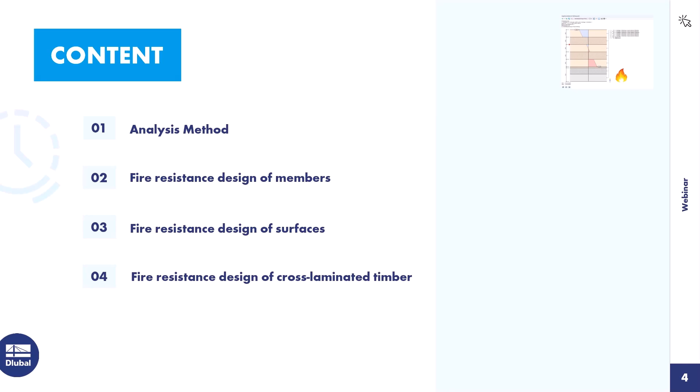So we start with theory, then we switch over into the program, we check a few members, we check the design of surfaces, and at the end we will design cross-laminated timber for fire design. Okay.

So the first topic today is about the general requirements. This content here comes from the Bavarian building regulations, and I am sure it is similar in your country. It does not make sense to have a more detailed look into any regulations because we have so many people here from so many countries and every country is a bit different. But I guess in general this sentence says everything, so that's why I read it.

Buildings must be arranged, constructed, modified and maintained in such a way that the outbreak of fire and the spread of fire and smoke are prevented, and that in the event of fire the rescue of people and animals and effective firefighting operations are possible. And I guess it is clear to everyone that this is our big aim.

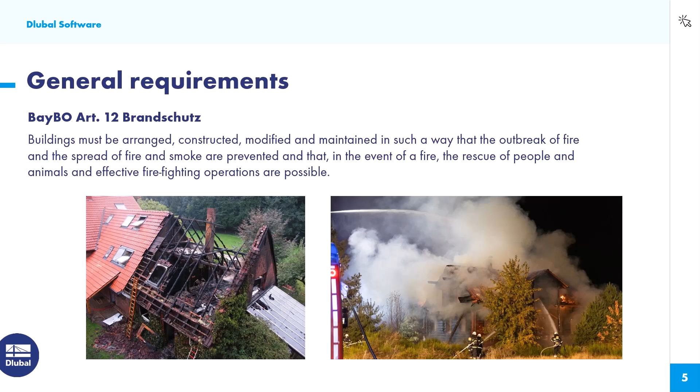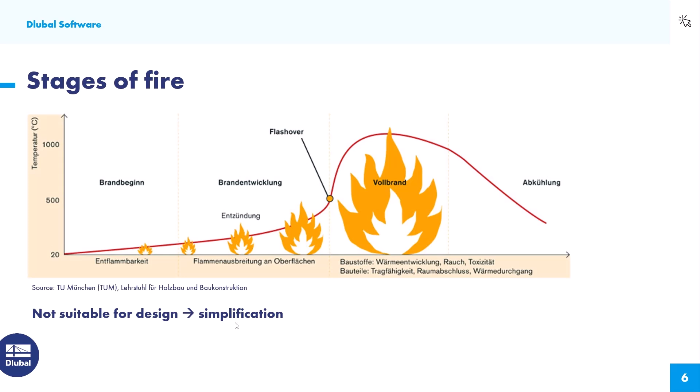Okay, so then we need to talk about stages of fire. The first stage is the non-flaming smoldering before it goes over to the developing fire stage. Then we get the flashover where we receive the fully developed fire before it comes to the decay stage. And of course, when we think about this red curve here, you can imagine that this is hard to simulate in a structural analysis. That's why we need a simplification, and how this simplification looks, you will see in the next slide.

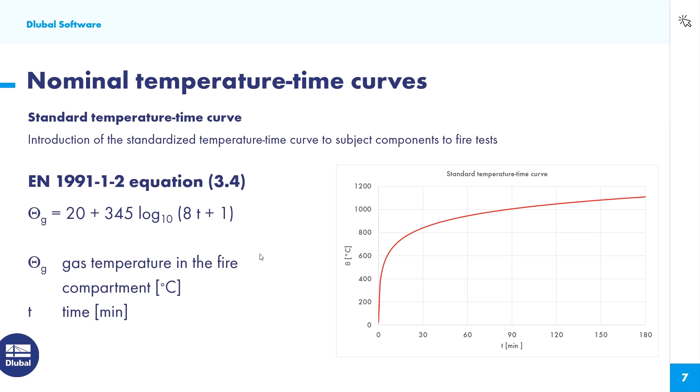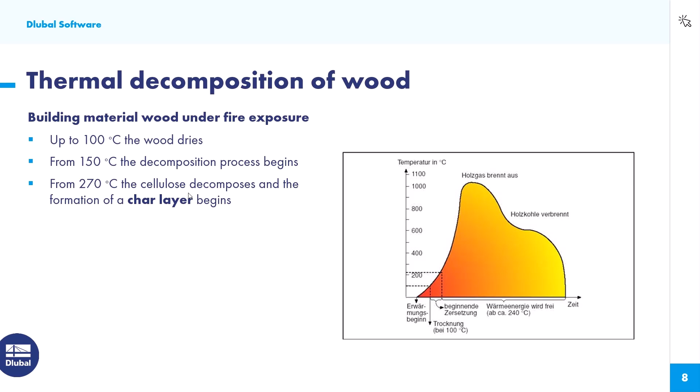Next slide is about thermal decomposition of wood. I guess it's clear to everyone that in the beginning the wood begins to dry. This is up to 100 degrees Celsius. From 150 degrees Celsius, the decomposition process begins. So we are around here. And it has its peak at around 270 degrees Celsius, where the cellulose decomposes and the formation of a char layer begins. And this char layer plays an important role, and it's actually the key for our timber design. That's why it's in bold letters.

A few properties of this char layer. This char layer has a lower thermal conductivity than unburned wood. That's why it delays the charring, and hopefully a residual cross-section remains. And that's the reason why we have a very favorable behavior during fire in case of timber. As you see here, when you check the cross-section after a few minutes, I don't know how many minutes these are, maybe 30 or 60, you will see that the timber inside is still brand new.

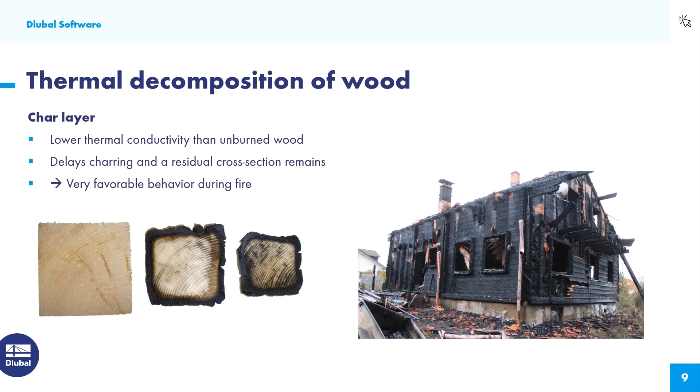Fire resistance classes. So I don't want to spend so much time on it, since I guess that's clear to everyone. We have these classifications. We have load-bearing components and non-load-bearing components, but of course we are focusing on the load-bearing components in our structural analysis. And we need to consider integrity or not. That depends on, of course, the building code or whatever.

In the new Eurocode, this plays a more important role, and also we are focusing on it in the future, but for now we have no integrity. Or we do not prove any integrity, since it is actually not a design check in terms of structural analysis, but as I mentioned, it plays a more important role in the new Eurocode.

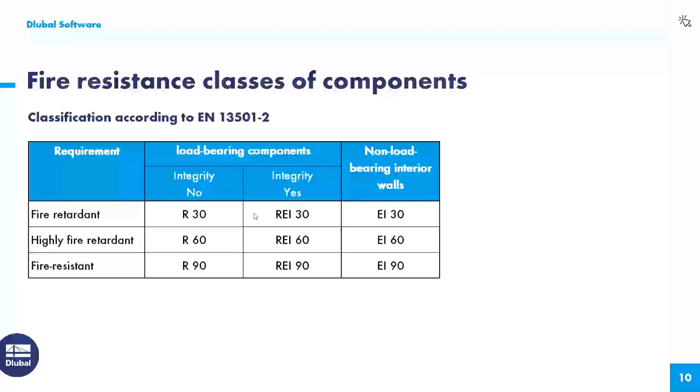Okay, fire retardant, highly fire retardant, fire resistant. I guess that's clear to everyone. We talk about R30, R60, or R90, or R120, and so on. The indexes here are described on the next slides. I don't want to spend much time here. Please check the video afterwards and pause it. You will be able to read it in detail. What we're talking about today, we're focusing only on the load-bearing capacity.

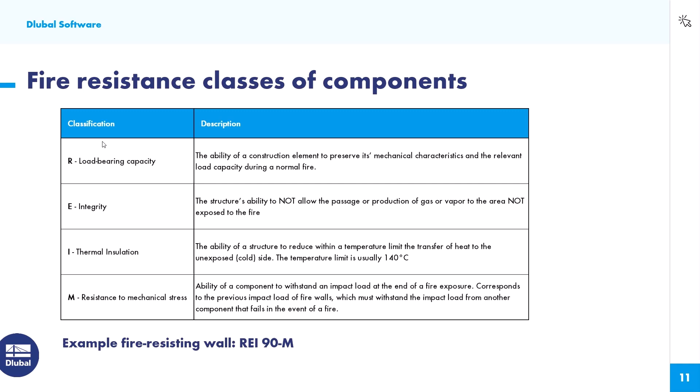Okay, so now let's start actually with the structural analysis part. Combination rules for actions. So we need to know which loads we can or we have to consider in case of fire design. In this case, we have to look into Eurocode 1, which refers to Eurocode 0, chapter 6.4.3.3. And this is nothing else than the extraordinary design situations.

There's a small error here. Sorry, it should be or and not the German word oder. I'm sorry for that. I forgot to replace it. So it's without any partial safety factors. You see it here, not for the dead load and also not for the variable loads. And there's only the question if you have to use ψ1 or ψ2 for the leading variable action, but this information you should get from the respective national annex of your country.

Okay, so there's also this simplification where you use the internal forces or the actions from the normal temperature design multiplied by some factor, and you can design with these internal forces, but I do not recommend using this simplification since it is mostly way too uneconomic. All right.

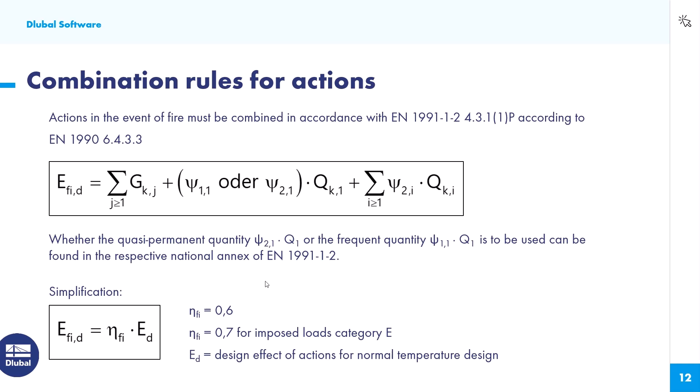Next slide is about strength and stiffness in case of fire. I guess you know these characteristic strengths fk, fm,k or fc,k and so on, ft,k. And this value is actually the 5% quantile value. In case of fire, we can use the 20% quantile value. So that means 20% of the values are lower and 80% of the values are higher than the characteristic values.

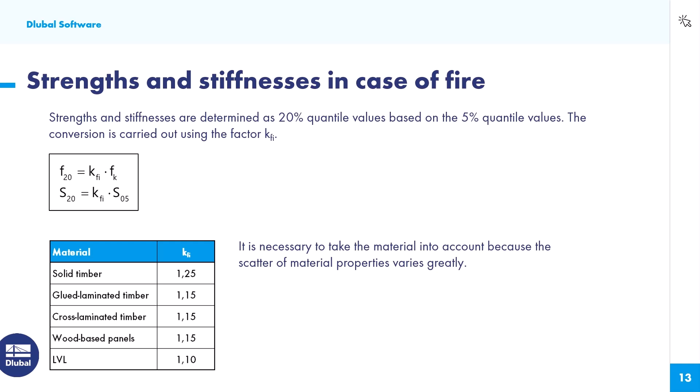Fortunately, there is no additional value in the material standards. They used this conversion factor k_fi, which helps us to keep this database as small as possible. And you see the 20% quantile value is dependent on the material. It depends on the scatter of the material properties because it varies greatly from solid timber to glulam, for example. And I guess it's clear that the properties scatter because of branches, cracks and whatever. Okay, that's it.

Let's have a look at this residual cross-section. When we check again this picture, we see the residual cross-section, but the question is only how we get this effective cross-section. And Eurocode 5 fortunately provides us charring rates for timber materials. It's clear that a residual cross-section should remain, otherwise the whole building will collapse. And it's simply defined by the area where the temperature does not exceed 300 degrees Celsius.

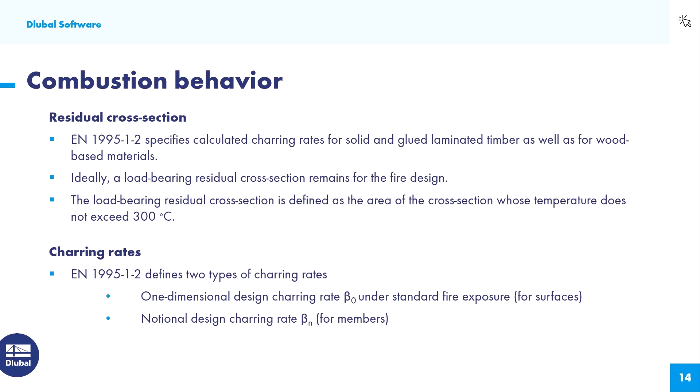Then we need to talk about charring rates. We have two types of charring rates. We have the one-dimensional charring rate, beta 0, which is used for surfaces in terms of RFEM. And we have the notional design charring rate, beta n, which is actually for members. Let's have a look at table 3.1 according to Eurocode 5. Here you will find the charring rate beta 0 and beta n. For glulam, for example, it's 0.65 and beta n is 0.7.

And the ratio, you can see, is much higher for solid timber than for glulam. The reason is because solid timber has a much rougher surface, and also cracks play an important role, and that's why this ratio is much higher than for glulam. So the one-dimensional charring depth can be calculated by multiplying the charring rate by the time. Also for the notional charring rate, we multiply the charring rate beta by the time.

And you see it's all about these corners here. When there is a fire, of course, there is no perfect sharp corner. You always have these roundings. It is time consuming to consider these roundings for timber design. That's why they have simplified it, and that's why we have this beta 0 and beta n charring rate.

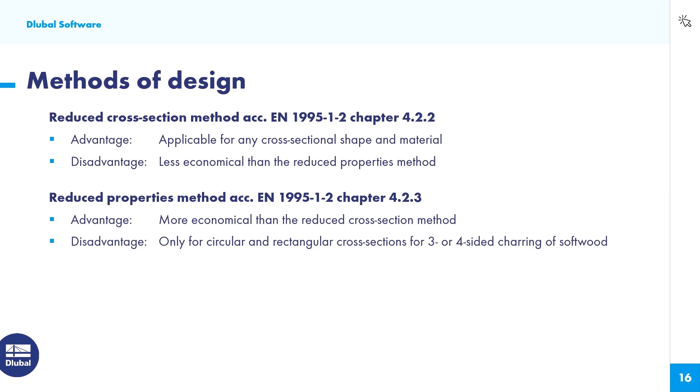In our program, we consider only the reduced cross-section method, but maybe in the future, I'm thinking about maybe to also introduce the reduced properties method, since the amount of work is not so high. So I'm thinking about to also take over the reduced properties method for the member design. Okay, let's have a detailed look at the different design methods.

Here we see the reduced cross-section method. Of course, we have the initial surface of the member, and it's getting reduced to the residual cross-section by the charring rate multiplied by the time, which we have here. And since the area between the blue and the yellow line here has also an increased temperature already, and therefore a reduced strength and reduced stiffness, this area should also be neglected.

And that's why, for times higher than 20 minutes, the factor k0 is 1 and d0 is 7 millimeters. So additionally we add 7 millimeters to our charring depth. When we go to the strengths, we have a kmod,fi factor, but do not interchange it with the kmod factor from the cold state design, where we have the kmod factor dependent on the load duration class.

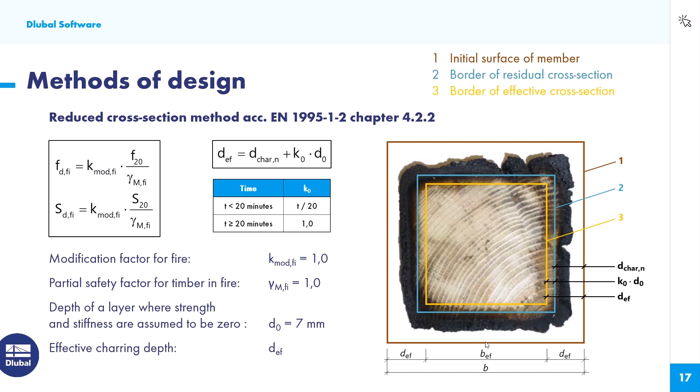Okay, the reduced properties method is actually similar. We have the initial surface of the member and we have the border of the residual cross-section. What we don't have is this additional 7 millimeters, so the yellow line here. That means the effective depth is the charring depth. But we have to consider a kmod factor which is smaller than 1.0. And this kmod factor depends on the perimeter of the fire-exposed residual cross-section and the area.

And this depends on the different strengths for bending, compression, tension. And that's why it maybe makes it a bit harder for us, since we have to fulfill the global design for all design checks. There is nothing listed for shear, and there's nothing listed for compression perpendicular to the grain. So maybe we need to find a solution to also introduce this reduced properties method, and I have already ideas for it.

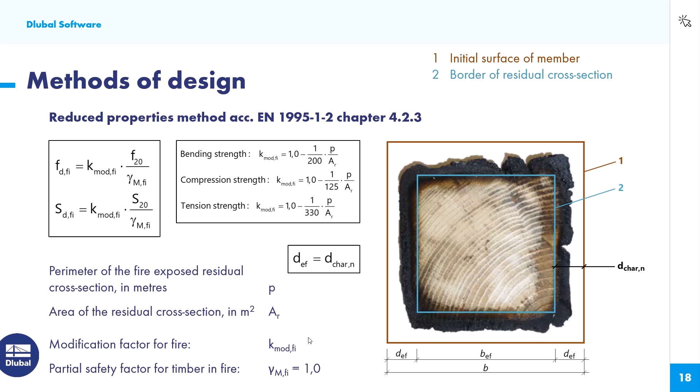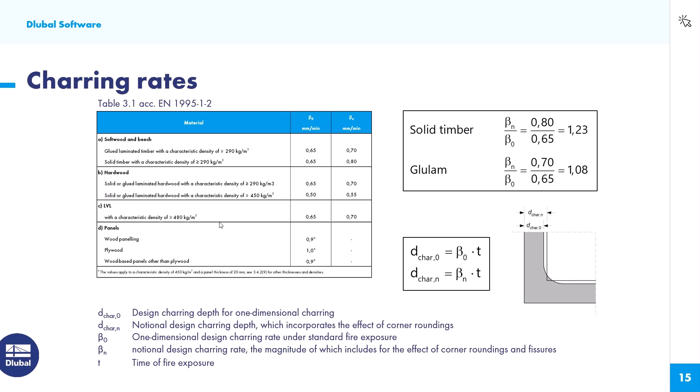Okay, that's it. Let's do a small example for this ceiling beam, which is softwood C24, 140 by 240 millimeters. Fire resistance period should be R30, and the charring should be at 3 sides: left, right side, and the bottom side. So we calculate our charring depth, multiplying the beta n factor from table 3.1. It's this table. Solid timber, which is C24. We have 0.8, multiplied by the time. In this case, it's R30, means 30 minutes.

We get 24 millimeters. And we additionally add 1.0 by 7 millimeters. And then we get an effective charring depth of 31 millimeters. Now we take the 31 millimeters 2 times and reduce it, and we get 78 millimeters for the width. And for the height, 240 millimeters minus 1 times 31 millimeters equals 209 millimeters. Actually, it's really simple. Okay, then let's switch over to RFEM.

So I'm sorry, maybe I should... I'm sorry. I have loaded the wrong files.

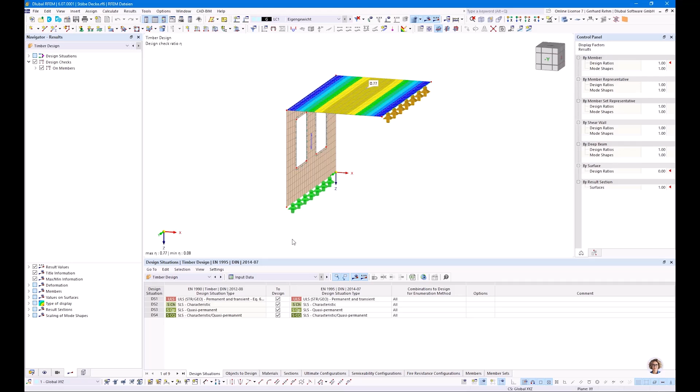Because they were already finished, and of course I want to start directly when our ULS and SLS design is fulfilled. So we see this floor here. I have shown this floor with different variants in another webinar, I guess a year ago or something. You will find this webinar also on our website. And now, of course, I want to extend it for fire design.

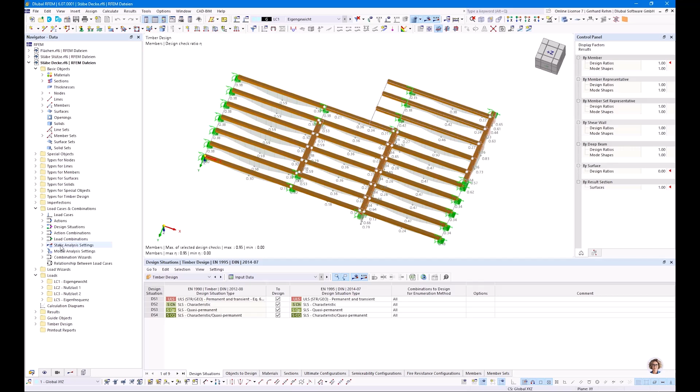And what we will do is we will add an additional design situation, because we need our actions in case of fire. Okay, so I added the design situations here, and I will add another design situation. In this case, I select accidental fire. Watch out, there is also accidental without fire, but this should be used for example for an impact load or something. In case of fire, please use this one here. It depends on the national annex.

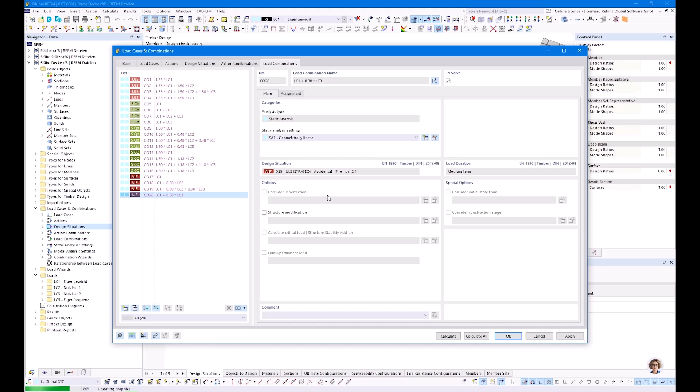Since we have only imposed loads and I use the German annex, I will use psi 2 in this case. Okay, and then we get our load combinations for ULS, cold state, and also the fire state, where we have imposed loads, dead load, and imposed loads on different spans. Okay. Of course, timber design results need to be deleted. We want to add fire design here.

All right, let's have a look at the floor beams. In this case, a fire resistance config was automatically assigned to it. So in case you don't receive any results for fire design, please check if a fire resistance configuration was defined here. Let's have a look at it. Okay, so there are different tabs for members, surfaces, and some standard parameters. So in this case, it's exposed to fire on 3 sides, so not the top side. And we check it against 30 minutes.

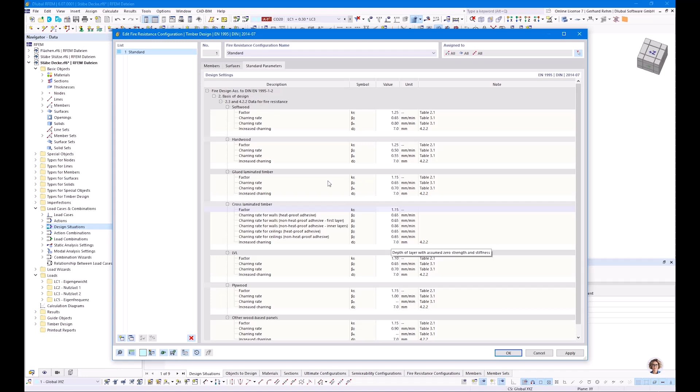And when we switch to standard parameters, you will see all these beta factors for different wood and for different timber material. Okay, and you are able to change these values in case of some special settings from some special approval or something. Okay, so that's actually it.

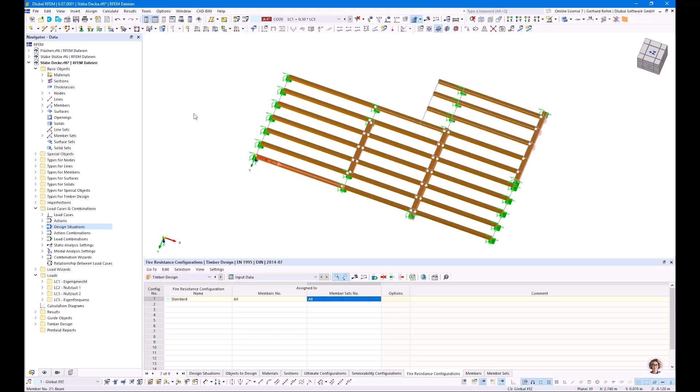So here we can also check which fire resistance config is assigned. So in this case, config 1 is assigned to all members and all member sets. Of course, if some member has a different setting, you can simply switch it here in this design configuration tab. And here you can also create new configs. Okay, so that's it. I guess for now I will run the analysis.

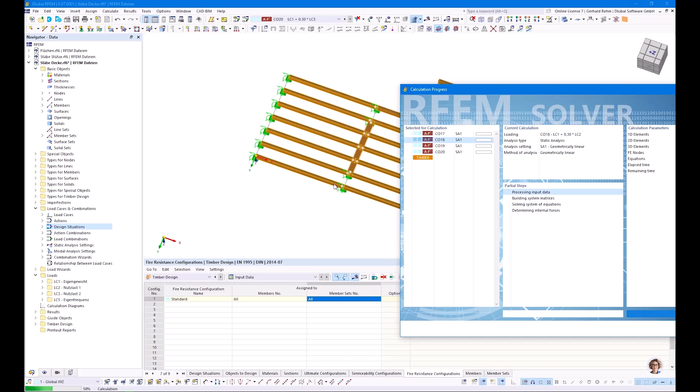And then we will check and compare, because the floor beams here, the ceiling beams, have exactly the same section like my hand calculation. So we had 140 by 240 millimeters. Okay, it does not matter, we don't take care of the numbers for this example. Let's check this member here, and we check fire resistance. Let's check bending. And let's have a look at it. So it's not so interesting.

We only see how the characteristic value is transferred into the 20 percent quantile value. So we increase the characteristic strength by factor 1.25. So it's okay. And k_mod,fi is 1.0, and also the partial safety factor for fire is 1.0. Here we get the information about the fire resistance.

So we have a t required of 30 minutes, and we have beta n of 0.8 millimeters per minute for this material, multiplied by 30 minutes equals 24 millimeters. We additionally add the 7 millimeters, and we get an effective charring depth of 31 millimeters and an effective section of 78 by 209 millimeters, which was exactly the same value as in our example here. Okay.

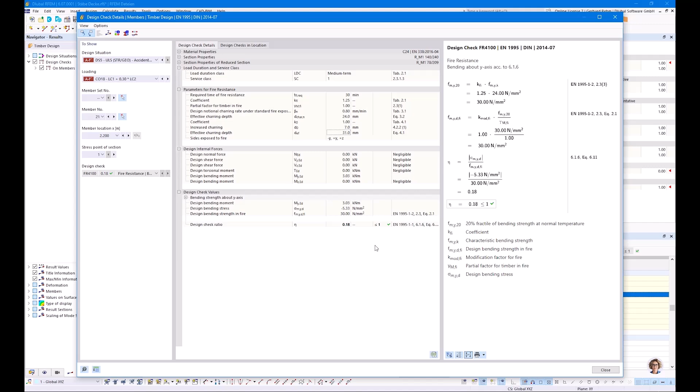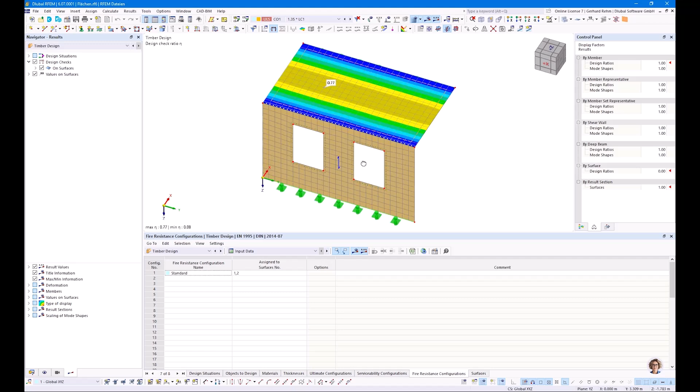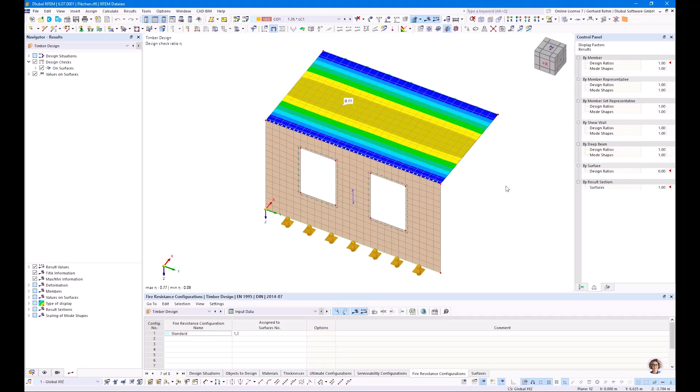Let's go directly to the next example. It was this one with surfaces. So there's a small additional building next to another building, but the other building was not modeled. So that's why I have this fixed support here on this side. There is a line hinge here on this side, and there is a support on the wall on the bottom side. So this floor here was made of an 80 millimeter glulam floor.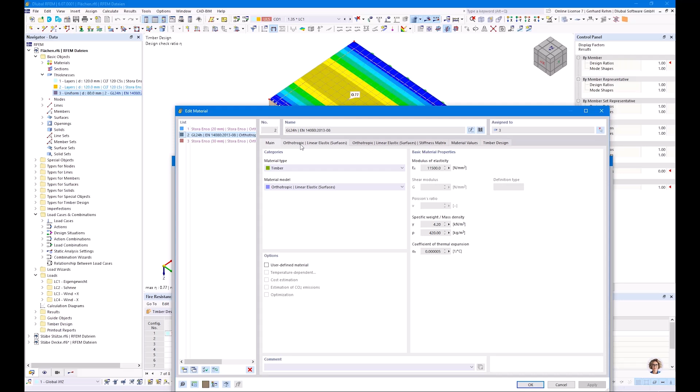So it's an orthotropic material model. So let's have a quick look at it. So I've switched to orthotropic linear elastic surfaces, where we have a different modulus in X and Y direction. Of course, this is made of multiple pieces of glulam, so maybe 80 by 625 millimeters or 620 millimeters or something.

And of course, there should be no moment transfer in Y direction of the surface, but since we span it directly in one direction, there is no big difference. Of course, if there is another support here, then maybe we should think about reducing the stiffness in Y direction or adding some line hinges, but for this example, it's absolutely okay.

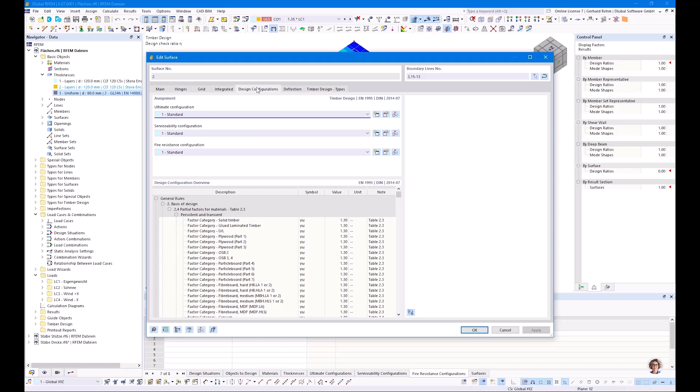Okay, so what I have done here was define some fire config for surfaces. So we check it. Let's check it against 90 minutes. To make an extreme example, you can imagine we have 80 millimeters and we expose it to fire for 90 minutes. Yeah, you can imagine what happens. And we want to have the fire only exposed on the bottom side. So that's all we enter for now. We come to all other settings later.

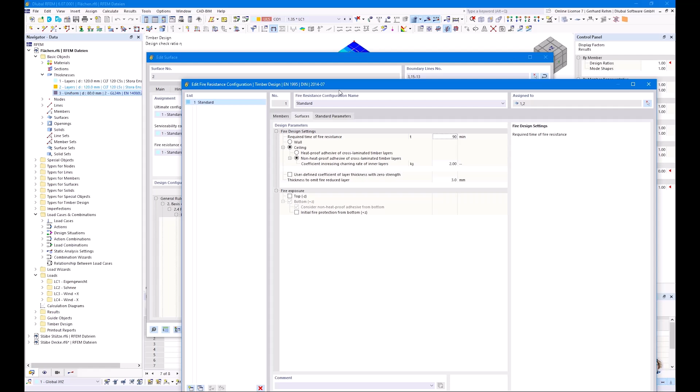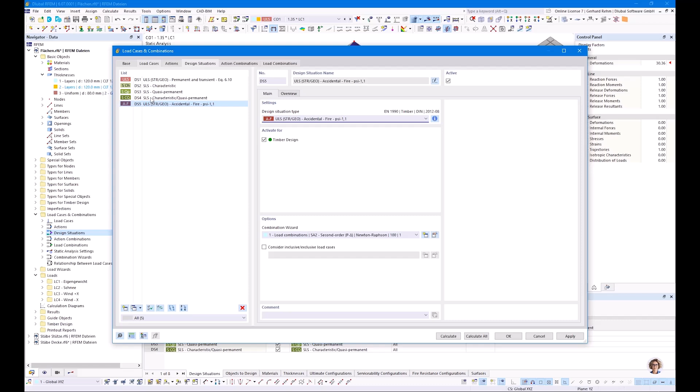Okay, so we need also this design situation. I will add a new one here. So in this case, I select this one because wind is also considered here. So we have dead load, we have snow load and wind load, and we have a really high dead load because I have defined 2.5 kilonewton for load case 1 in this example.

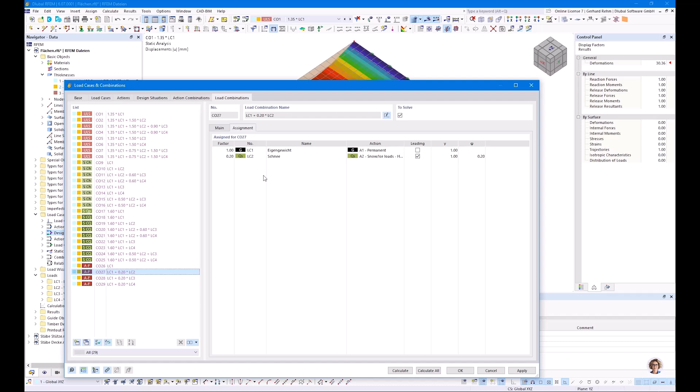Okay, let's check it. Yeah, we have load case 1, load case 2, which is snow, load case 3, which is wind, and load case 4, which is also wind. As I mentioned for the German annex, this load combination can be neglected, but for now I'll leave it. Okay, so that's actually all. Oh, sorry, I forgot to create it. A minute. I hit the cancel button and not the OK button. That's why it was not saved.

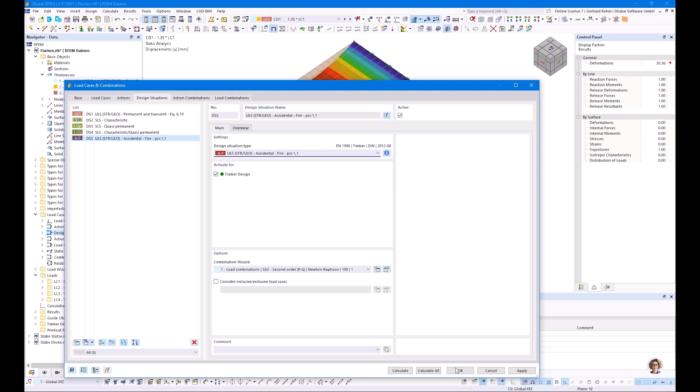Yeah, let's use the first one. Okay, that's actually all. We focus only on the floor for now. I start the analysis and then let's check what happens. So maybe have a focus on this diagram here. You see already the deformation becomes extremely high. So we are around 1 meter 30, 1 meter 40 deformation. And you see there are some errors, but fortunately we get some results.

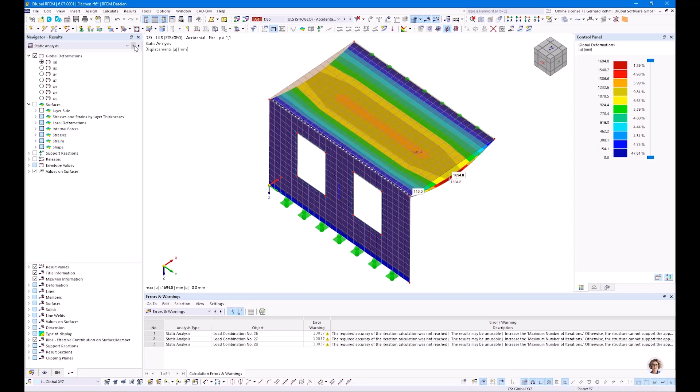But of course, when we check the deformation for this load case, the maximum deformation is 1 meter 60. The span of the floor has only 3 meters, so it's 50% of the span length. I guess it's clear that no firefighter will enter this room when he sees that the floor will deform like this. But at least we get results. But watch out, it can happen when you don't take care of it. Of course, nobody would apply 90 minutes to an 80 millimeter panel.

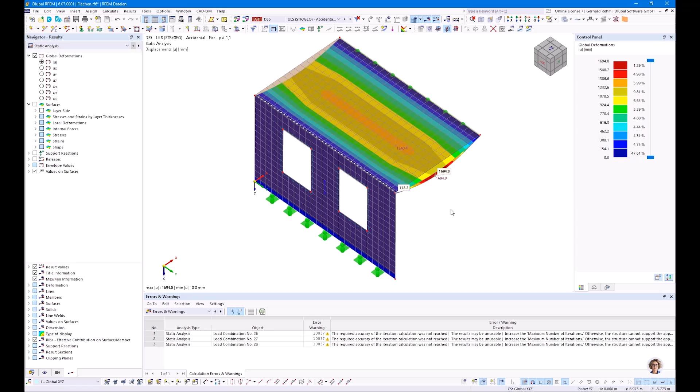So it can happen that the structure becomes unstable, especially when we talk about P-delta analysis, so second order effects. Then of course the critical load factor plays an important role, and the structure becomes unstable under some circumstances. This needs to be considered. Okay, so in this case, it's clear this floor will definitely not work. And when we check the ratios here, you see directly the ratio is extremely high. Let's check it directly. We have the charring depth here calculated, and the remaining thickness of the surface is 14.5 millimeters.

You can enter and see each intermediate value here in this dialog. But there's also this diagram here on top, or when you close it and click here, let's switch to the stresses, you will see we had the 80 millimeter, and the remaining effective thickness is only 14.5 millimeters, which is of course too low. And the charring depth here can be seen as 65.5 millimeters.

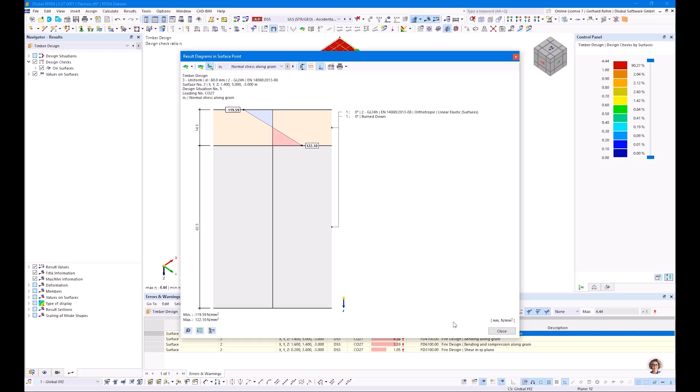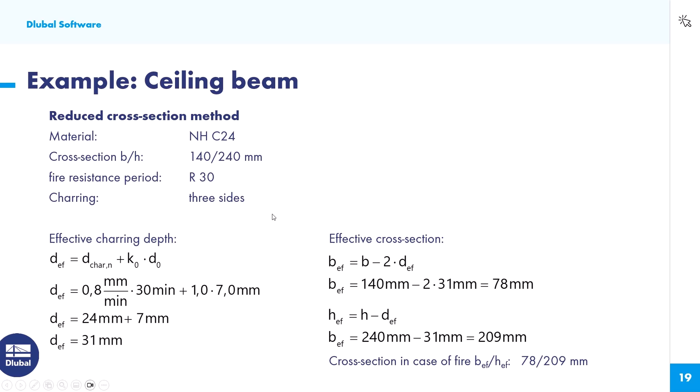And now the question is how we can fix this. Of course, we can increase the thickness of the surface, but there is another way we can consider. So let's go back to our PowerPoint. And now we talk about initially protected components. As you can see, this is, I guess, the most common case, to cover it with gypsum boards.

The advantage in this case is we save time, because the gypsum boards, or all other claddings, cause a delay, so the timber will start to burn much later than without this cladding. Of course, it always depends on whether the timber should be visible or not. But in case it's not visible, then we can apply such claddings.

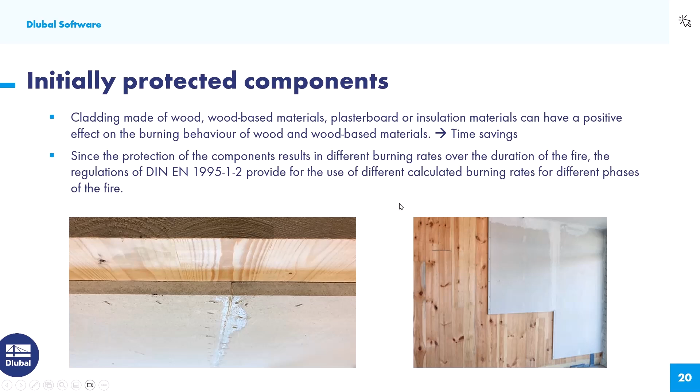The Eurocode describes different stages or phases of fire, and we will have a look at it in detail now. Maybe you have seen similar diagrams like this. So curve 1 is the charring rate for the unprotected surface. That means we have linear charring; this here is the charring depth. It's nothing else than beta 0 multiplied by the time. And of course, it is linear, and the timber starts to burn exactly at t equals 0.

And now we come to this delay when we use some protection. Here we see two different curves, curve 2 and curve 3. We will talk about both curves in detail on the next slides. Here you see the time of the delay of charring due to protection equals the failure time of protection. That means the protection will fall down from the floor, for example, at the same time the fire starts on the timber.

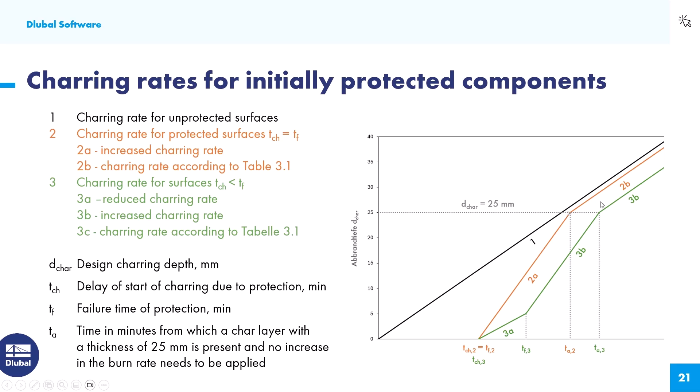Okay, let's have a look at it in detail. For wood-based panels and gypsum plasterboards type A and H, we can use this curve number 2, where the start of charring equals the failing time of the protection. For wood, it's simple. We can simply divide the panel thickness by the charring rate, and then we know the time.

For the, I guess, most common case using gypsum plasterboards, we have equations in the Eurocode for filled joints or gaps smaller than 2 millimeters, or for gaps larger than 2 millimeters. So for a typical 12.5 millimeter plasterboard, the charring time here is 21 minutes. So the fire will start 20 minutes later.

But as you can see here, we have an increased charring rate afterwards. So at the end, I guess this was 60 minutes, we don't save much time, because here we can consider a linear curve, and here it's bilinear. So we have an increased charring rate here.

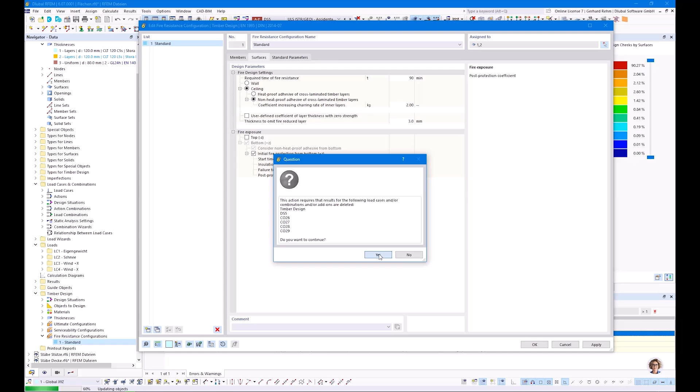In this case, let's start with TF equal to T charring, and this increasing factor K3 should be considered with 2.0. So, okay, we need to recalculate everything. As you saw, also the internal forces and the results from the load combination for the accidental actions got deleted because we sent the reduced section to the solver. So all the stiffness is considered with a reduced stiffness for surfaces.

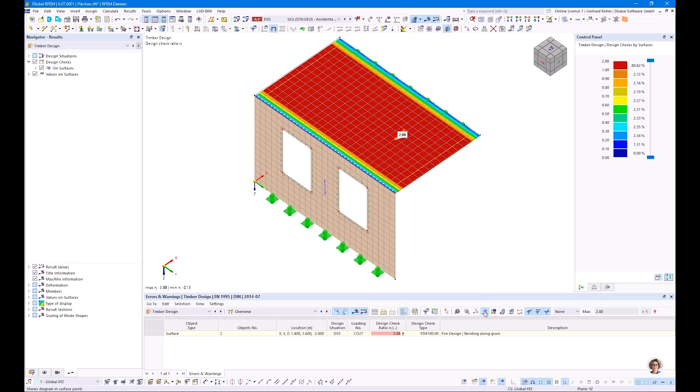Okay, when we run the analysis again, before we had an effective section of 14.5 or 14.8 millimeter. Deformation was at 1.60 meters. Now we get a deformation of around 1.30 meters or 1 meter or something, a ratio of 288%, of course, still too high. Let's check the thickness. Okay, we won 1 or 1.5 millimeters, so not really much.

Okay, let's go here to surfaces again, and maybe let's try the value from ÖNORM or from the global Eurocode. Let's switch to 31.5 minutes. But sorry, my mistake. It was for the walls. In this case, we should consider here the floor. In this case, maybe better to use two-layered. So this is this cell here. It's 1.4 multiplied by 2 by 12.5 millimeters plus 4. Becomes 39 minutes. Okay, so maybe better directly to use 39 minutes here.

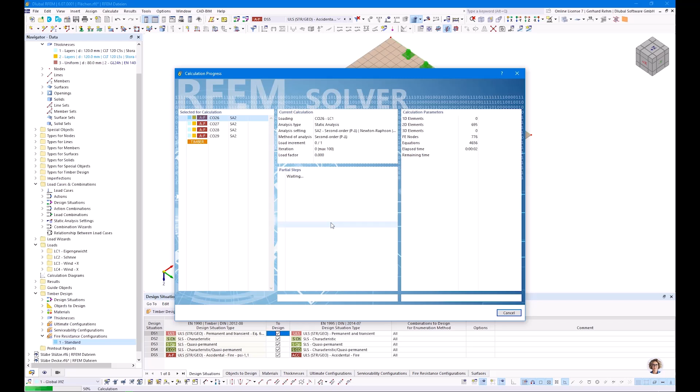And then let's see how far we can go, and maybe we come close to the 100% ratio. Okay, the deformation is at 30 centimeters, which is not too bad in case of fire, and the ratio is close to 100%, so it's 1.31. Since we have already 2 layers of gypsum board on it, maybe it's worth to think about increasing the thickness of timber. In this case, I'm nearly sure an increase of 100 millimeter will be enough in this example. But okay, that's okay for now.

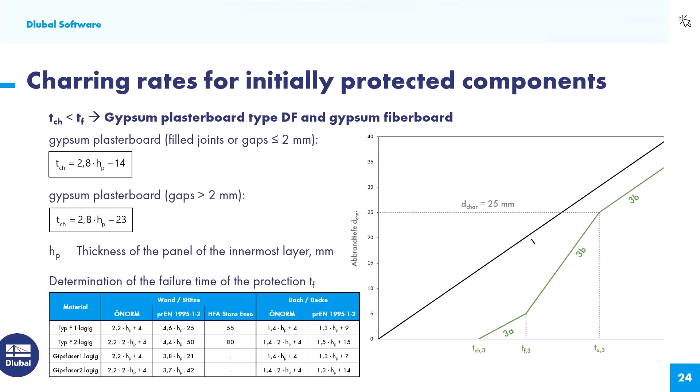Time is running quick. Maybe switch over directly to the slides and have a look on CLT, which has some special rules. Before I start with CLT, as you know, it's not directly regulated in the current Eurocode. It is covered in a few annexes like the German and the Austrian one, but this design is not part of any annex. So this is actually the current state of the technique, and it will be also part of the new Eurocode, and it is also already in some approvals from producers. So for example, Stora Enso, they use this approach, and also a few others.

Okay, so first we talk about linear charring. That's nothing else than our solid timber. So same rules. The only additional rule is for CLT and linear charring, layers smaller than 3 millimeters should not be considered anymore in the design, because the charring is of course not perfectly symmetric over the whole surface, and that's why it's better to neglect layer thicknesses smaller than 3 millimeters.

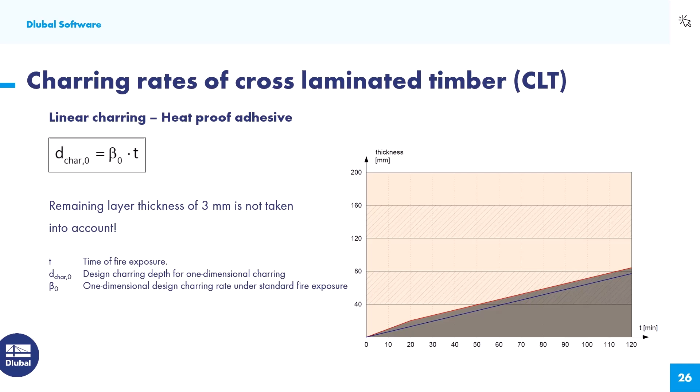And the linear charring can be used only for heat-proof adhesive. Mostly this is not the case for CLT, so I don't know any producer. Maybe there are producers which use heat-proof adhesive, but it is more common to use non-heat-proof adhesive, like the polyurethane adhesives. In this case, we need to consider a non-linear charring, because the temperature influence on adhesive causes delamination. Yeah.

Let's have a look on this image here. You will see this is a CLT floor. You see the longitudinal layers and the transversal layers here. And yeah, you see this char layer, which actually helps us to reduce the fire, is completely gone within a second. It is there, then it falls down, and then there is no protection. And the temperature in the timber is really high. It's really dry, and you can imagine there is an additional increase in charring rate.

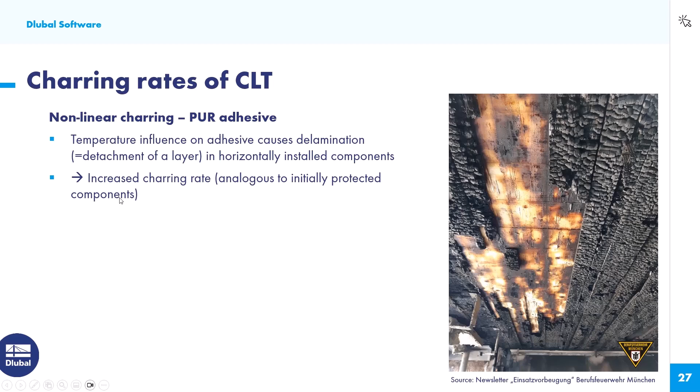So the first layer is 0.65 millimeters per minute, for example. And then we come to the second layer. So let's assume the layer falls down. The timber behind is already threatened with a high temperature. That means we get an additional increased charring rate. In this case we call it k3. So it's also factor 2, similar to the initial.

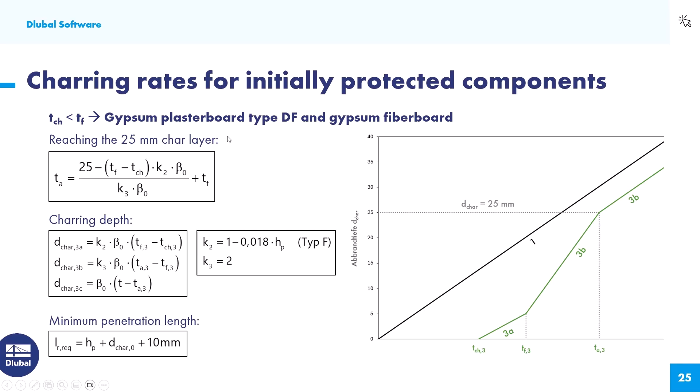Let's switch to this slide, to the initially protected components. And here we go. When the char layer actually reaches 25 millimeters, we can continue with the normal charring rate, and then it starts from scratch. So from here again, and so on.

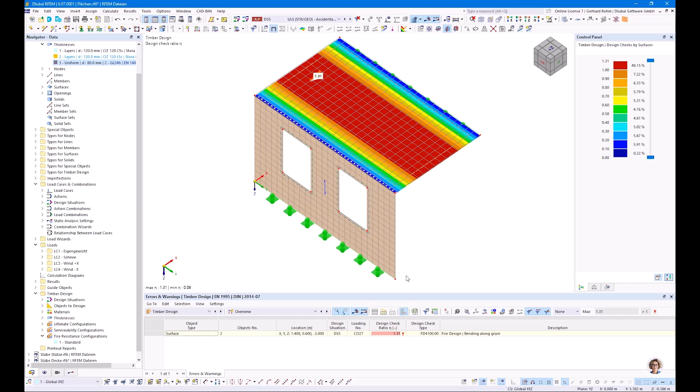In a few approvals and also in literature this value is recommended. Also, 3 millimeters should not be taken into account. Let's have a look into the program again. I will replace this layer by layer number 2, which I have prepared already. It's a 5-layered Stora Enso composition with 30, 20, 20, 20, 30 millimeters.

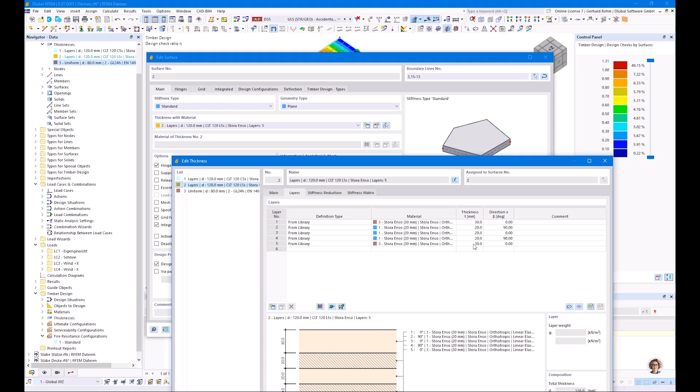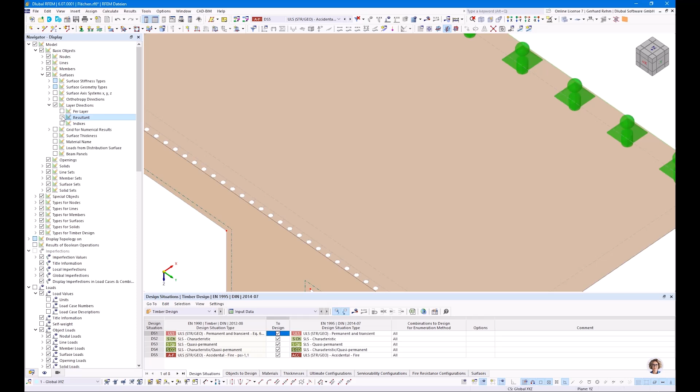The span direction can be checked here with these blue arrows. You will find them in the display navigator, surfaces, layer direction, and I display the resultant. You are also able to show it per layer with indices, and then you see the layer direction directly. But for this example, I prefer to see the resultant stiffness direction.

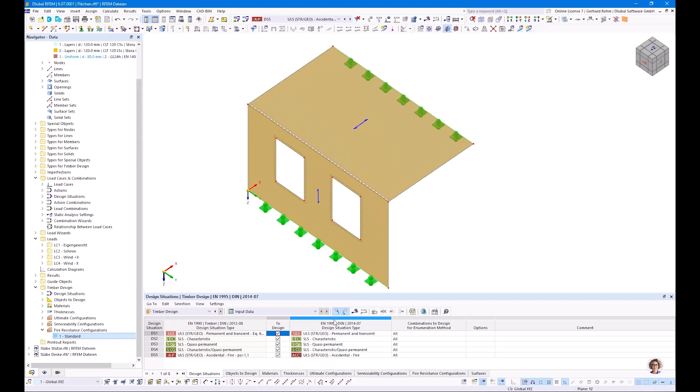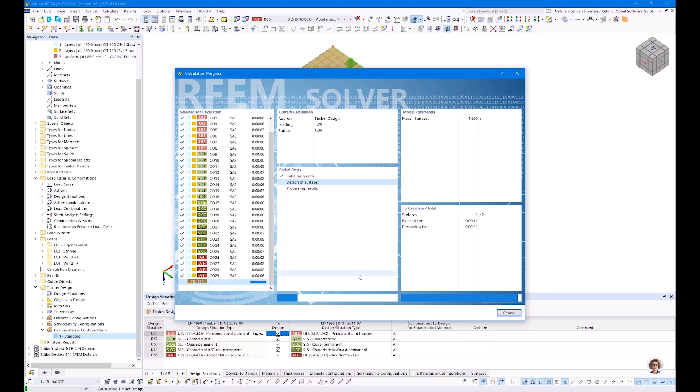Let's have a look at the ratios, for, let's say, higher than 20%, and we get a smaller overview: ULS design is 20%, SLS around 31%, and fire design will control in this case with a ratio of 79%. Let's have a look at it in detail. We check the charring depths and we get the information directly.

Layer number 5 fails, number 4 fails, layer number 3 fails, and layer number 2 will be reduced to 12.6 millimeters. Of course, it's much easier and nicer to see the effective section here in this dialog. Maybe we switch to stresses again. You will see 77.4 millimeters will fail, 30 millimeters on top will remain, and on the second layer 12.6 millimeters will remain.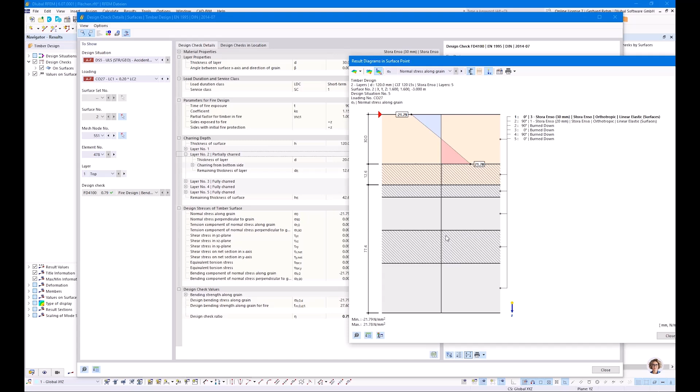But since this is the transversal layer, this layer is not able to support the first layer. That's why the stresses are only considered on the top layer. This helps us a lot to understand the effective section. But I agree, checking the charring rate inside the tables is sometimes a bit tricky. You can check each intermediate value, but it would be much smarter to see it graphically.

That's why we are introducing now, finished in a few weeks, this time course monitor, where you can see the charring depth over time. This helps you a lot to understand and compare it with my slides. For example, on the right side is a floor, and we see the border of the residual cross section, and we add the 7 millimeters here. That's covered by this red line.

So we have a protection, because the burning starts at 21 minutes in this example. Then we have the double charring rate. Then we reach the 25 millimeter limit, and we have the normal charring rate again. Then again the double charring rate until we reach 40 plus 25 equals 65 millimeters, and then we continue with the normal one again. On the left side we see a wall. On this side, it's not covered with the protection.

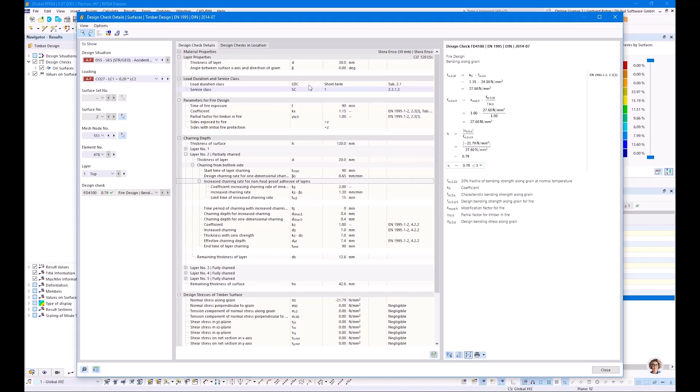rate. On the bottom side, we see a protection, and here it's the same. We start with the increased charring rate until we reach the first or the second layer, and then we continue with this 0.86 millimeter or whatever you have defined in the fire design config. So here you will see it for cross-laminated timber, dependent on whether you have heat-proof adhesive or non-heat-proof.

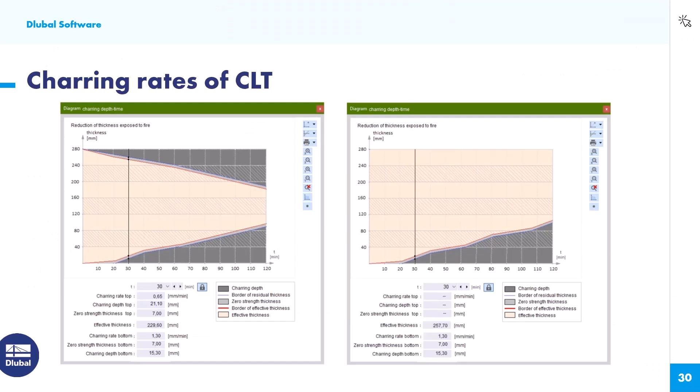Oh, I forgot to show you. Here in this surface dialog, you will find the distinction between wall and ceiling. When you select ceiling, then this approach here will be used. And when you select wall, this approach will be used. Of course, the program does not know if this is a wall or a floor. This needs to be a user input. And dependent on the setting here, you will get this.

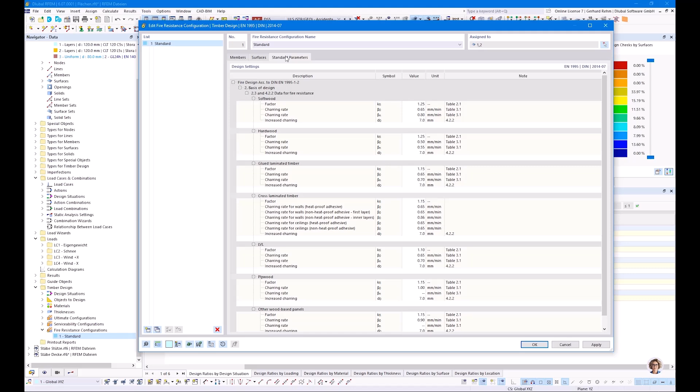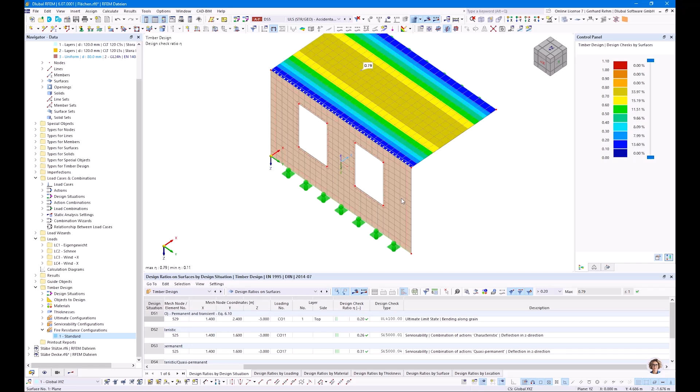Time is already over, but I will show you the wall configuration. So you need to create a new fire config. So I create a new one. For surfaces, you can switch over to wall in this case. Define your required time and your settings. If it's exposed on top or bottom side, top is always minus Z direction and bottom is always plus Z direction. So when you right click on the surface, you can activate the local axis systems here, and then you see plus is in plus direction and minus is in minus direction.

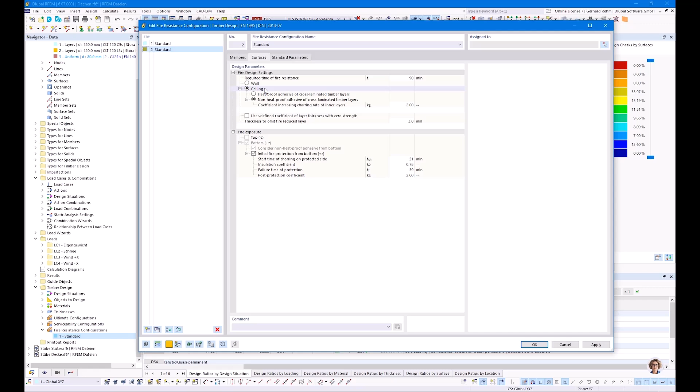And don't forget to, wait a minute, I forgot it. I will switch over to wall, or maybe I don't want to create a new one. I want to create a copy, and I will switch to wall. Okay, and now I have assigned the wall config to my wall.

Okay, so for now, that's it from my side. I'm thinking about doing another webinar on this, especially when we talk about wall design and buckling design of CLT. We already had a webinar about buckling design of CLT in RFEM 5, which can actually be transferred to RFEM 6. But maybe in the future, I plan to do a webinar where I also show the eccentric effects and the buckling effects on these walls, for example.

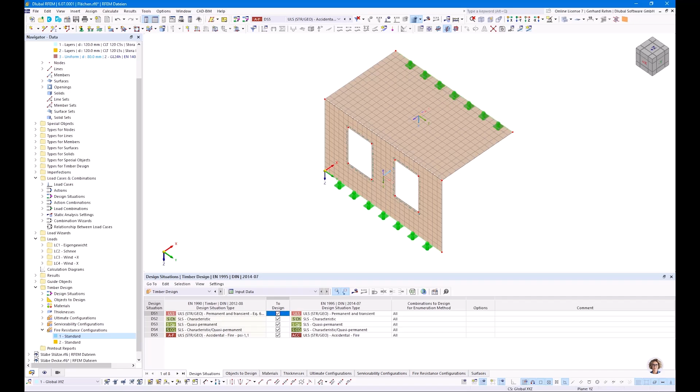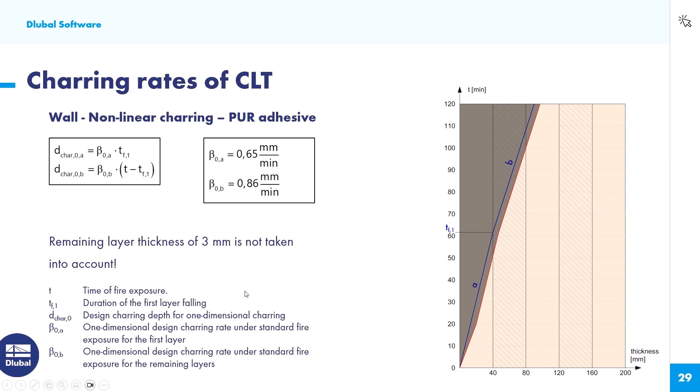So as you saw, it was really focused on this PowerPoint, but I was focused on all this information to provide it also to following users who watch the webinars and learn about this fire resistance. This helps the user, of course, 24/7, and this helps us in the hotline where we don't have to answer the questions because you can check it out in this webinar. And hopefully I fulfilled your expectations, and that's it for now. Hopefully I did not forget anything.

Oh, maybe some words on literature recommendations. Unfortunately, I'm not familiar with English literature, so I know only the German ones because the German ones are already really good. I'm sure there is English literature, but I have no clue about it. Maybe you can send me some English literature sources, and then I can add them to this PowerPoint later.